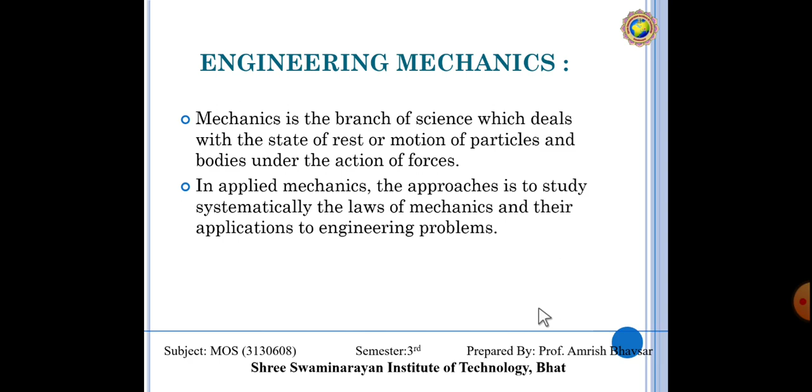So, basically, mechanics of solids is the combination of the mathematical steps we use for the solution of anything and the concepts and principles of physics; that combination creates the whole subject. In applied mechanics, the approach is to study systematically the laws of mechanics and their application to engineering problems. We use the laws of mechanics and principles of physics in the solution of engineering problems, that is called applied mechanics. We are applying the laws of physics and mathematics, that's why it is called applied mechanics. So mechanics is the branch of science, and applied mechanics is the application of mechanics to engineering problems.

Now, mechanics is divided into three parts. The first one is mechanics of rigid bodies. What is a rigid body? Whenever we apply a force on any body and that body does not change its shape and size, that is called a rigid body. But whenever we apply a force on a body and, before moving, it is compressed or in tension, meaning the deformation of that particular body, that is called mechanics of deformable bodies.

And the third one is mechanics of fluids. Fluid mechanics will be studied by you in further semesters in detail. But in this applied mechanics, we are going to study only two things, mechanics of rigid bodies as well as mechanics of deformable bodies. Rigid bodies are part of engineering mechanics, and deformable bodies are part of strength of materials. In that, we understand the strength of all the materials we use in engineering. So in engineering mechanics, meaning rigid bodies, there are two types.

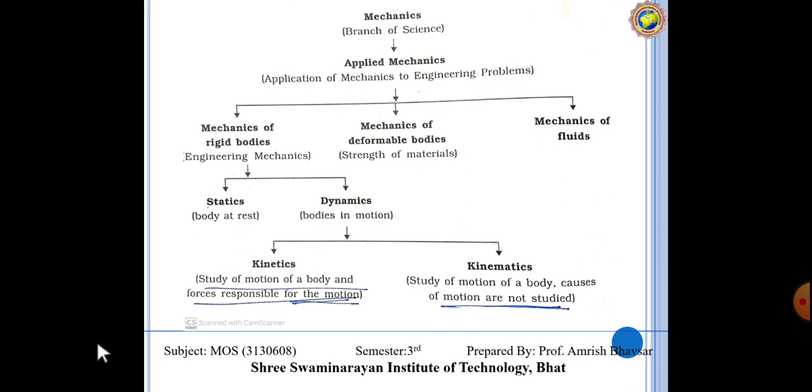Now, what is the fundamental concept? In this, we are going to study about space. So you know what space is. Space is the region in all directions and contains everything within it, as for example, sun, stars, planets, etc. We know about space. Time, we know what time is. It is the duration between two successive events.

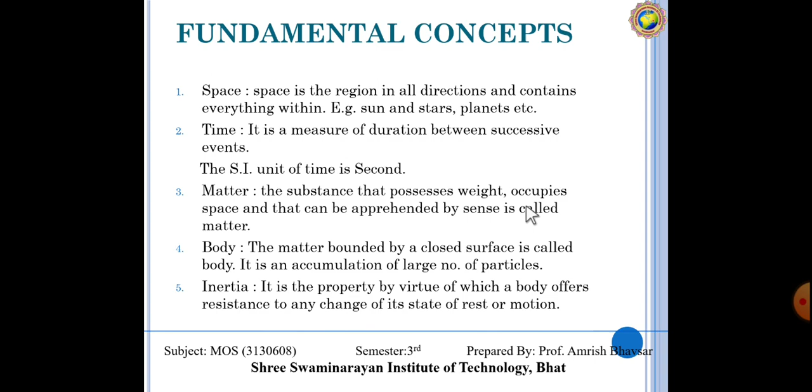Matter, that also we studied in physics. The substance that possesses weight, occupies space and can be perceived by the senses is called matter. What is a body? That we know, any rigid body. Inertia, that also you know in detail. What is mass? That you have studied in physics. Rest means its standing position, that is called rest. And motion, whenever the body is moving, that is called motion. So this is the fundamental concept that we are going to use in engineering mechanics.

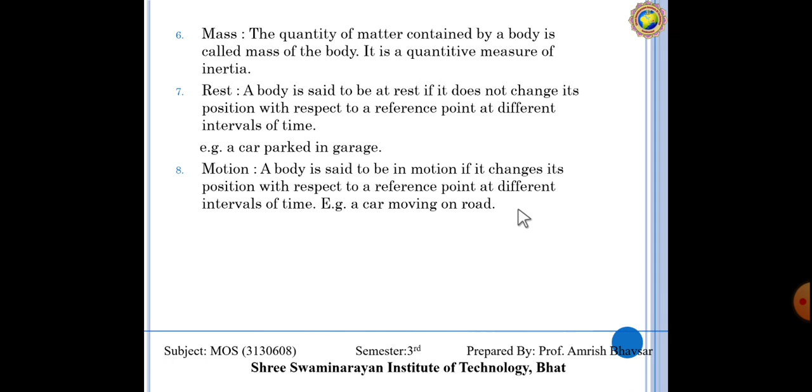Now, idealization of mechanics. Again, the things used in this mechanics we have studied previously in physics. As we discussed, engineering mechanics means mechanics of solids. The whole subject totally depends on physics. So the idealization of mechanics, what you understood in physics: what is a particle, what is a rigid body, what is a deformable body, what is a continuum, the whole things that you know.

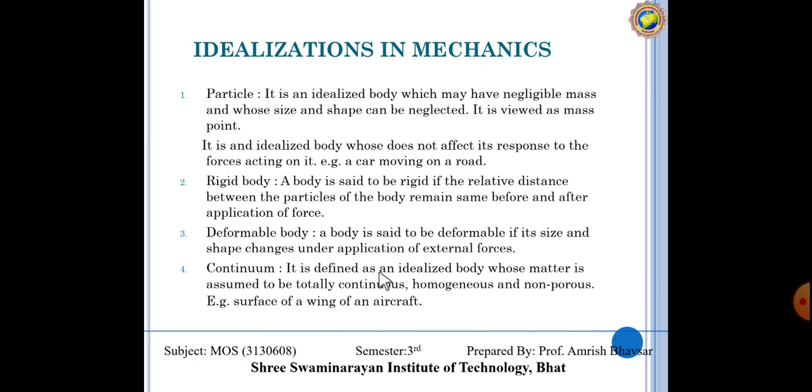As I said, a body is said to be rigid if the relative distance between two particles of the body remains the same before and after the application of force. Means it can't be moved. But what is a deformable body? A body is said to be deformable if its size and shape change under the application of external force. That is called a deformable body. So these are the common things that we use.

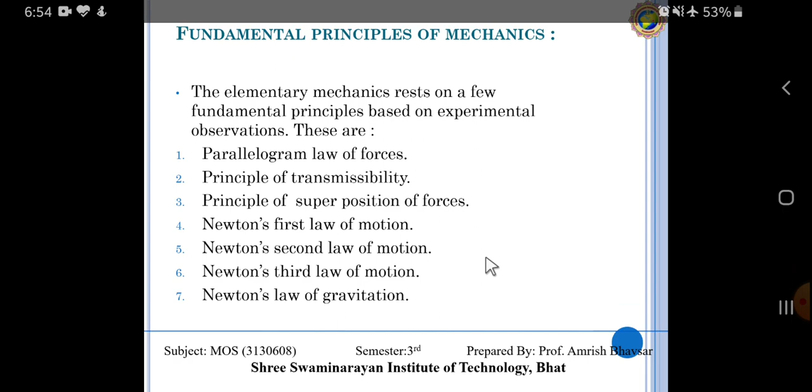Now, the most important thing, that is the fundamental principles of mechanics. You know who is the founder of motion? We know his name, that is Newton. You studied physics and you have heard the story of the apple. That guy Newton is the founder of engineering. Why? Because without motion, engineering is zero. Whether it is the mechanical branch, civil branch, electrical, whatever kind of branch, all these branches are related to motion, and the founder of that motion is Newton.

He has given us the basic fundamentals of mechanics. That fundamental is known as the principles of mechanics. So, which are those principles? Elementary mechanics rests on a few fundamental principles based on experimental observation.

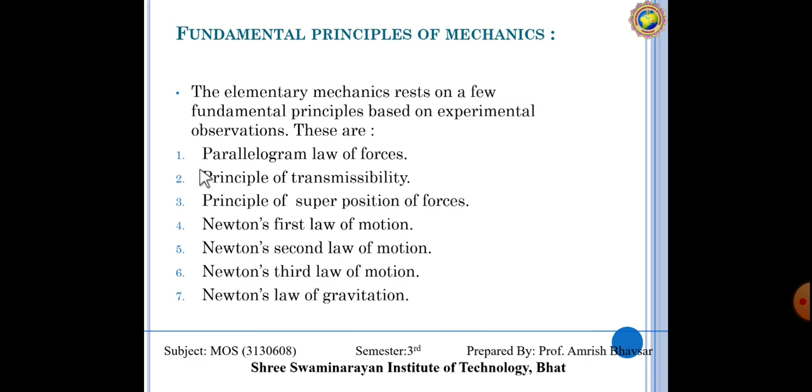Newton's first law of motion, Newton's second law of motion, Newton's third law of motion, and Newton's law of gravitation, that we know very well. But again, there are three new fundamentals that are important now for this subject: parallelogram law of forces, principle of transmissibility, and principle of superposition of forces. So these 7 principles are used for the solution of engineering problems.

Again, the most important thing, that is fundamental units. You have studied in physics the measured units made from the 3 fundamental units, that is length, mass and time. Regarding engineering, there are some other units, but whenever we use units in engineering, they totally depend on these 3 units: length, mass and time. From this we can make the equations, and the units of these fundamental quantities are called fundamental units or base units.

Derived units: the units of some physical quantities are derived from the fundamental units. Such units are called derived units, like area, velocity, acceleration.

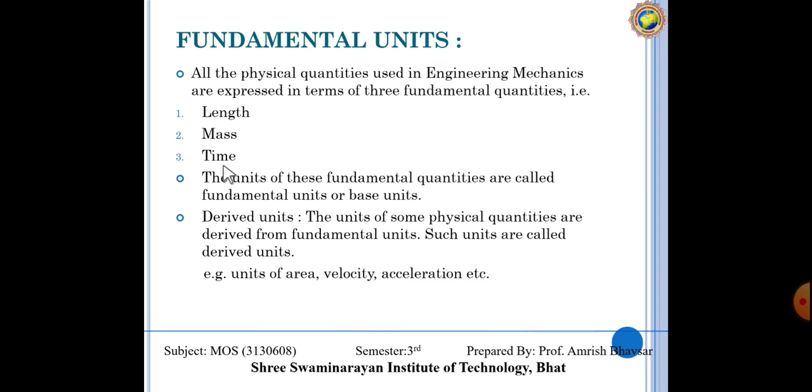Weight of any element, force, these all depend on mass. So these 3 units, length, mass and time, are very important for us. From these units we have systems of units, and these systems of units are adopted by different countries. Like in India, all the units are in the MKS system, meaning meter kilogram second.

Let's try to understand. Here in India, all distances are measured in meters. All the weights we use are in kilograms, and time always remains the same for all countries, that is seconds. But the FPS system, foot pound second, is adopted by European countries. Again, centimeter gram second is adopted by some other countries. So different countries use these systems. In India we use the MKS system, and this is called the SI system.

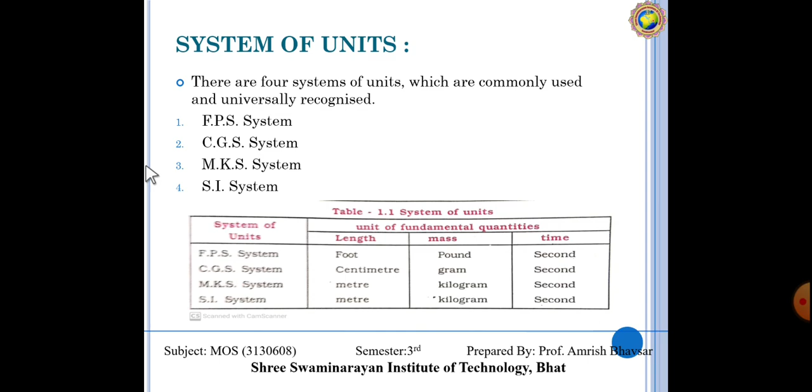But how is that possible? You know, many years ago the Europeans were in India and they taught us how to measure dimensions, and their European system is foot pound second. So we use that system and are familiar with it. We still use it today, but whenever we submit our drawings or deal with the government, we must use the MKS system.

Now, from this system we have to convert our units, from kg to kilonewton, meter to foot, foot to meter, because we deal with all kinds of units. So the most important thing is that we have knowledge of conversions. Without conversion we can't do anything, because if I take force, the unit of force is kilonewton; force is found in Newtons and the unit fixed for force is the Newton.

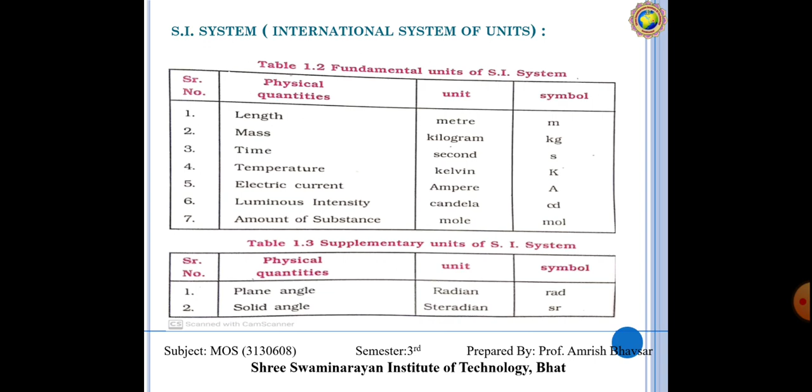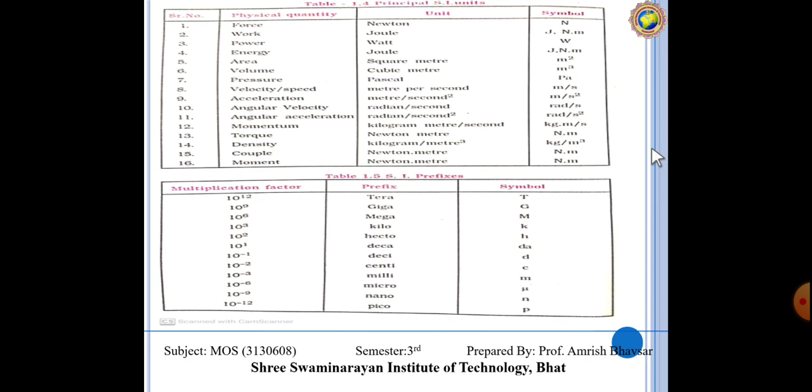But we have things that are measured in kilograms. So if we do some calculation, we have to convert kg to kilonewton, because all our equations are made up in kilonewton units. So these are the conversions, the basic science you studied in physics. Now, conversion is most important. These are the basic conversions for distance, weight and other units, and you must know how to convert them.

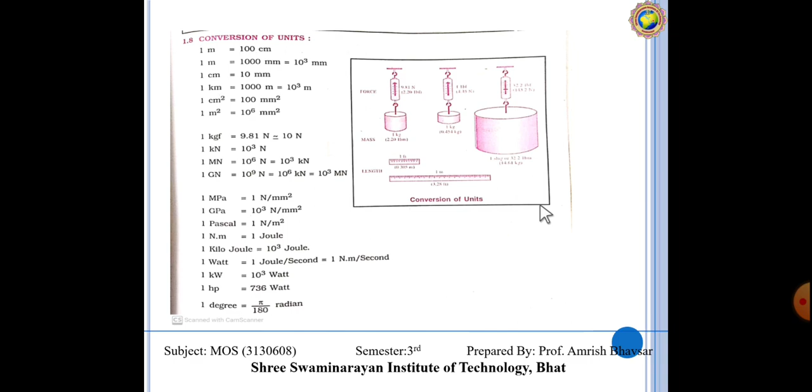And what is a scalar quantity and what is a vector quantity, we have studied in physics also: Adish Rashi and Sadish Rashi. A scalar quantity is one which can be completely specified by magnitude only. For example, length, distance, area, volume, time, work, mass, density, temperature, speed, energy, moment of inertia. These are scalar quantities, in which only magnitude is there.

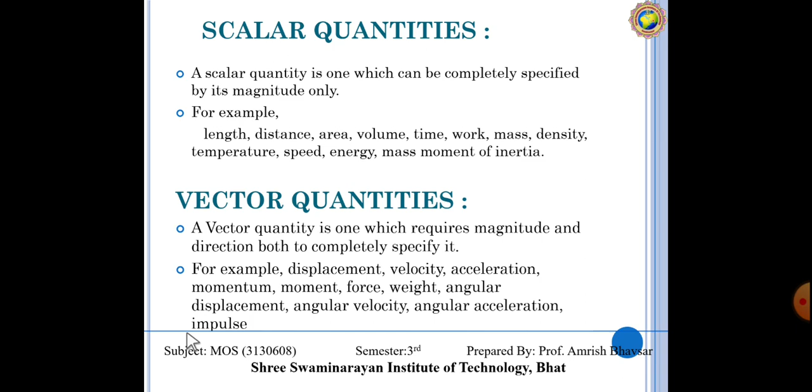But in a vector quantity, both direction and magnitude are there. A vector quantity is one which requires both magnitude and direction to completely specify it. For example, displacement, velocity, acceleration, momentum, moment, force, weight, angular displacement are all vector quantities. So these are the basic things we are going to use in this subject, and this is the introduction of our subject. Clear? So, thank you very much.